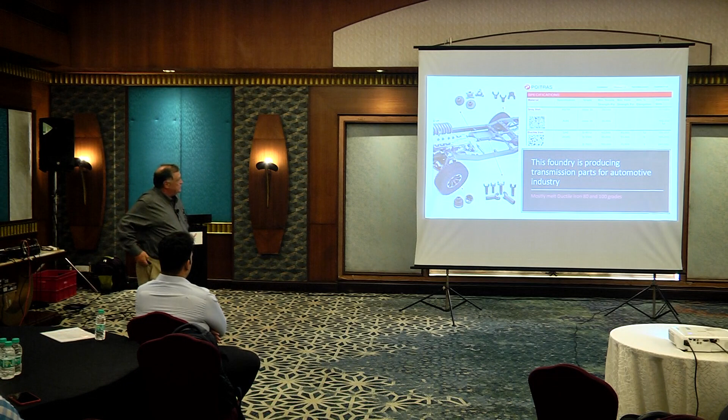So this is just kind of an introduction of what this foundry is. It's an automotive foundry. They make various automotive parts, from transmissions all the way to other areas.

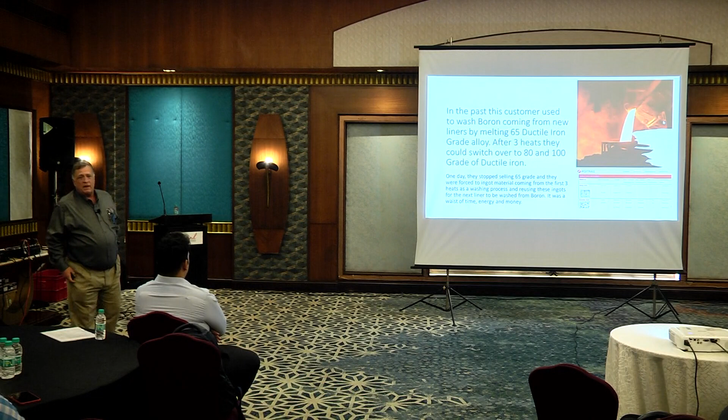In the past, the customer had to wash boron coming from the liners by melting 65 grade ductile iron alloy, and after 3 heats they could switch over to 80 to 100 grade ductile iron. Then one day they stopped selling the 65 grade, so they had no choice but to do wash heats, because their customers, as we're finding in Europe, are requesting that the boron content come down. They would have to melt 3 heats and just pig it out to get to a point where the lining no longer gave off boron.

This foundry has two 3.5 ton ABB and two 9-ton ABB furnaces. They used to use something probably never seen in India, but used in Canada and a bit in Europe, called LD, which is low dust silica. That was made back in the early to mid 90s to reduce the amount of dust people breathe in during installation. We have new products for that which we'll talk about later. Method of charge is with a magnet, and they have different top capping methods which we'll discuss later too.

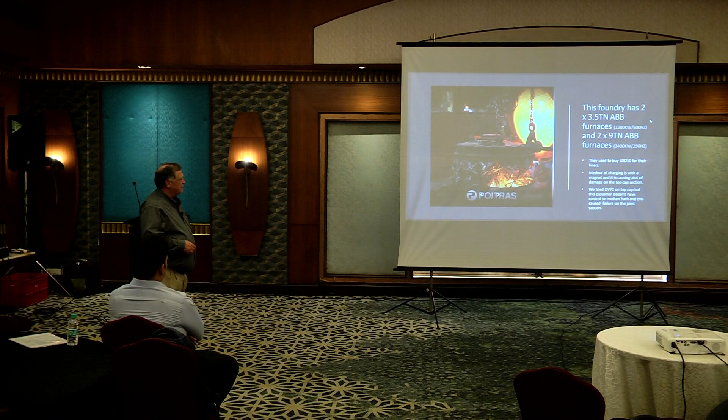As you can see, they're filling the walls. It's basically the same process—nothing different as far as the installation goes. The installation process is exactly the same.

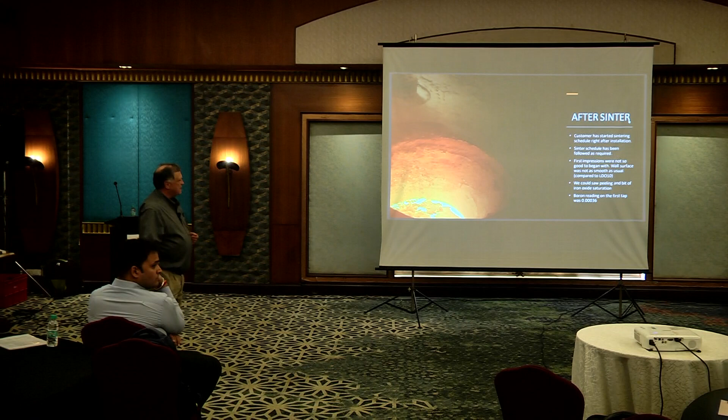What they found, and this has been an issue in the early stages, is the customer sintered it exactly the same way as their standard linings, which is about an 18-hour sinter cycle with solid charge. The sinter schedule has been followed as required by them.

The first impressions weren't good from this particular customer. In the initial hot face, you can see a little bit of peeling of the liner right down in here. That peeling was very thin—it was skin, mostly, like a skin peeling.

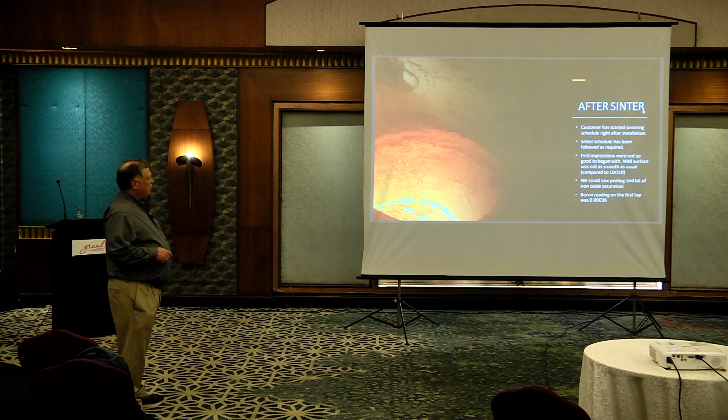But what they did like is that their boron on the first tap was at 0.00036, almost non-existent, and that was well within the specifications of their customer.

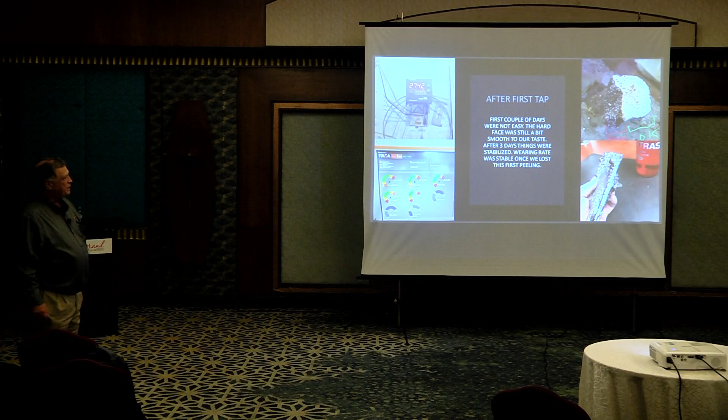As you can see, the first couple of days were not easy. They had hot face issues which concerned them because it was a new product—we don't blame them whatsoever. After 3 days they were stabilizing. The wear rate stabilized once we lost the initial peeling of the hot face, and the lining ran quite well after that. It really wasn't an issue.

So 70 tons, 300 heats. The only place we still had an issue was in the bottom—there was some of the bottom that was missing, but not enough to cause any harm or damage or even alarm.

Mid-campaign they stopped. The customer decided to push it at 320 tons. They could have gone longer—the lining was still perfectly good. But since it's an experimental material, they wanted to take a look at it just to see.

Before we sold the ideal rammer, campaigns for the LDO10 were 650 tons. Now they're using the ideal equipment, and the campaigns go up to 850. They were using a different vibrating method that just wasn't sufficient for their needs, and just by changing the vibration method they were able to get better lining life.

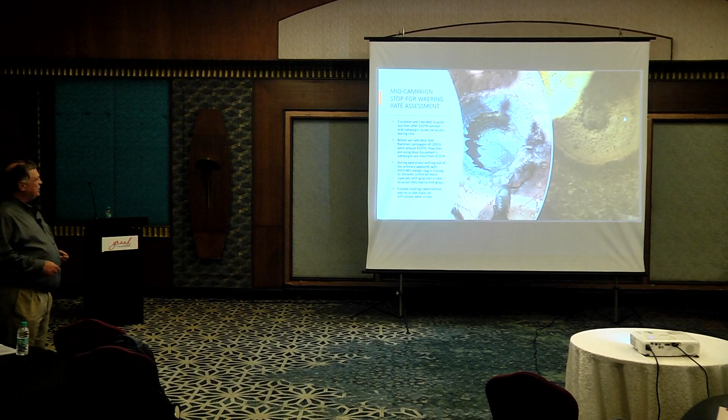During the operation, nothing out of the ordinary happened with the boron-free silica, except for the walls being a little brittle. Furnace readings were normal, no visible cracks, and infiltration was not visible.

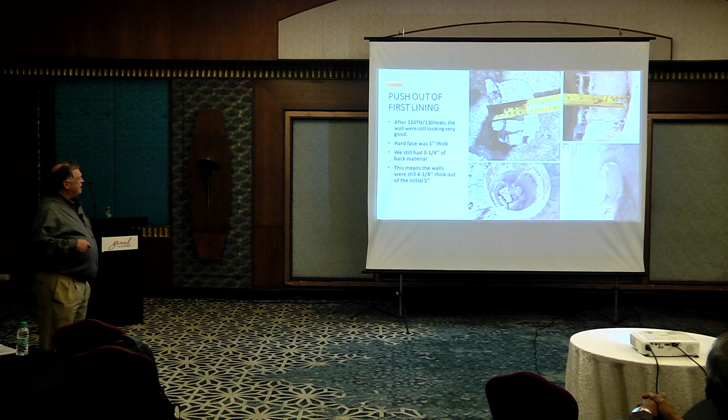Then they took it out and basically analyzed every layer as they were taking it out. As you can see, there's still about 100 mm of lining left, and you can see there was quite a bit of loose backup still present in that lining. So that lining could have gone a lot further, but they took it out again just so they could do an analysis, since it was the first time they used it.

So now we went to the second one, and they wanted to find a way they could control the sinter a little bit more without adding boron oxide, of course.

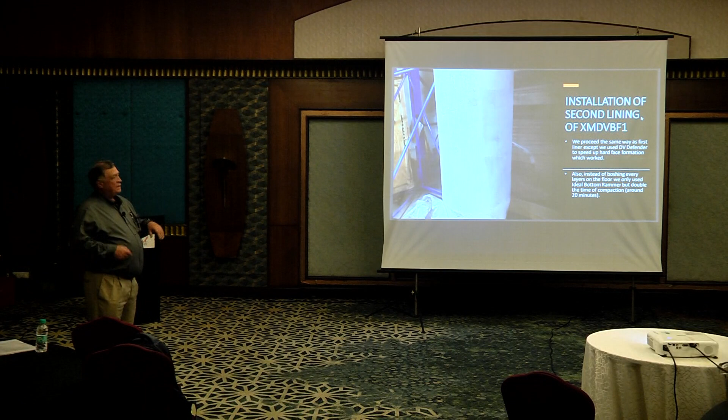Allied has a product, it's here, it's called DV Defender. DV Defender is a paint, and you paint it on your former and let it dry overnight, then do the installation of your silica just like you would normally. During the sinter cycle, this is a very low melt temperature coating that seals the silica, seals the porosity of the silica, so it makes it a little bit easier to sinter a furnace.

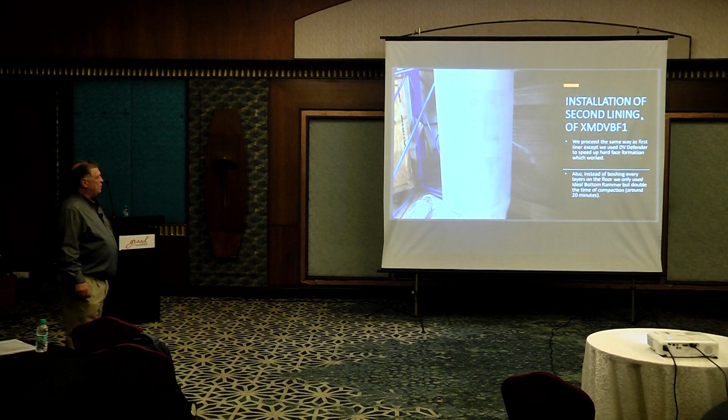And we thought that if we tried this, this may eliminate the peeling issues we had. So instead of boshing every layer in the floor, we only used ideal rammer, but doubled the time of the compaction.

After 95 tons or 40 heats, we could see a stronger hot face than the first lining had. Boron reading at the first tap was 0.0002.

First cool down after 140 tons, 60 heats, there was some brittle material on the floor. We sent samples to be analyzed, but again, it was nothing alarming. The lining could run a lot more time.

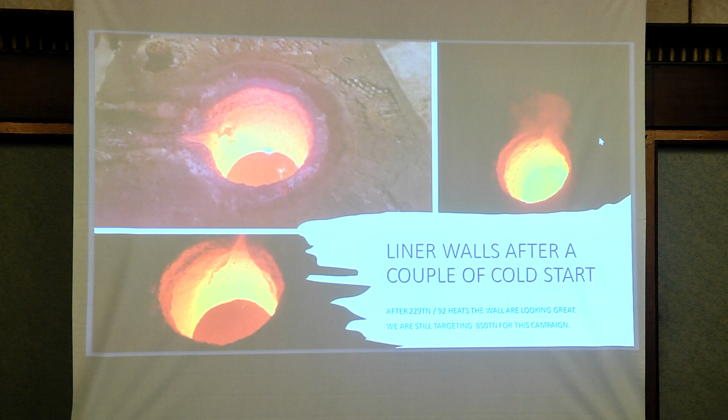Liner walls after a couple of cold starts. After 92 heats, the walls are looking great still. We're still teaching, we're still targeting 850 tons.

So after 400 tons, observation is the wear was the same as standard silica, except on the floor. And of course, the boron content is coming way down.

Like I said, this is an experiment. We've been working on this product. Some of our competitors have also been working on this product for up to 10 years. Believe it or not, you think just taking boron oxide out and putting another bond in would be easy. Turns out it was not. So this took a very long time to develop. This is probably the third generation of mixes that we've made, and I think that we finally found a winner in this one.

So if you have any concerns with boron content in your castings, we have this available if required.

So the second lining push out. They stopped after 523 tons, but the liner was still good. Again, they wanted to get it out so they could do maintenance of the furnace, but they also wanted to see it again, to see what it looked like with more heats on it. Step by step, they just wanted to be careful.

In concordance with usual campaign, there was no difference. They checked their lining every time they take it out. Hard face had an overall thickness of 1 inch. Wall thickness in the midsection was 3 inches. And you can see that we had a very good hot face formation, followed by a very good semi-sintered zone. So everything was good.

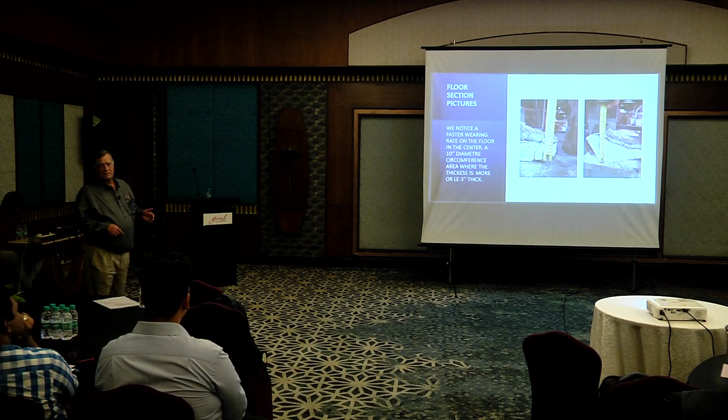So now they're going to the 9-ton furnace. The customer used 2 bags of no-bond material before installing the floor. And again, they use the exact same thing. They're going to use the jolter.

And we did use Defender on this form again, just to let you know. So the ideal rammer vibrated the form for 15 minutes in the taper, and 2 minutes every 4 inches, going all the way up the wall.

Again, they did their normal sinter with solid charge. Quite frankly, in a 9-ton furnace, in this particular case, I'm probably going to recommend that we liquid sinter with heat. There's several ways of sintering a furnace, but liquid sinter with heat, where you heat it to 1100 degrees, 1000, whatever you can get, with charge in the bottom, and then you pour liquid metal. I think that will probably enhance their hot face.

So the hard hot face would have benefited from Defender coating on the steel form, as we found out. The 9-ton furnace is using 3,400 kilowatts at 250 hertz. And again, they're using the magnet on this furnace also.

So we discussed better charging practices, of course. There's no space there for them to put the shaker system, so they have no choice but to go with some sort of a magnet or a bucket charge. I think they're trying to talk them into a bucket charge. It's a little bit more controlled.

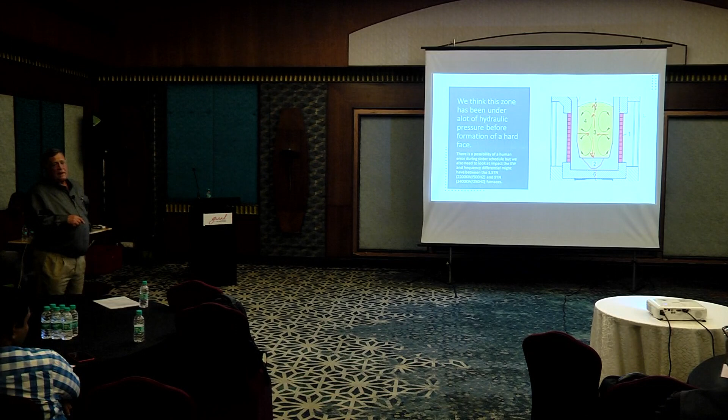So there's a possibility of human error during the sinter cycle, but we also need to look at the impact of the KW and the frequency differential that might have been between the 3.5 ton. We believe what happened was there was a problem in the installation, and the furnace got saturated, and that saturation caused very rapid erosion.

So next steps and possible solutions: we'll modify XMDVBF to accelerate hot face formation. We're now in the process of making a 4th generation. The customer will install 2 coats of Defender on the steel form every time they do it. And the sinter schedule could be modified to increase final temperature and allow heat to radiate to the floor, promoting a hard hot face.

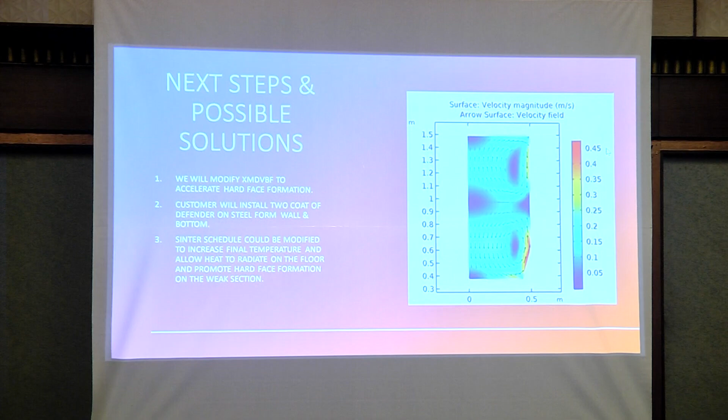This is where I was telling you, I believe if you did a liquid sinter, that would alleviate all of these problems because you'd form a much faster, much cleaner hot face. What happens is when you get molten in the bottom first, you have a small amount of metal with a high amount of power. So that metal is just churning very fast, and that material doesn't form a very quick hot face, and it probably prematurely saturated.

This is the next new silica product that we've developed in the market.

But unfortunately, economically speaking, there's nothing better than silica in iron. So the governments, who know nothing about what we do, don't think about that. They just think, let's eliminate silica. That would cost every foundry about 10 times more than their lining cost.

So we've developed this product called TEK-SIL. It's a silica with 99% lower respirable silica, meaning that as you're doing the installation, there's almost no harmful silica being breathed by the workers. Respirable crystalline silica is a common material found in many naturally occurring materials.

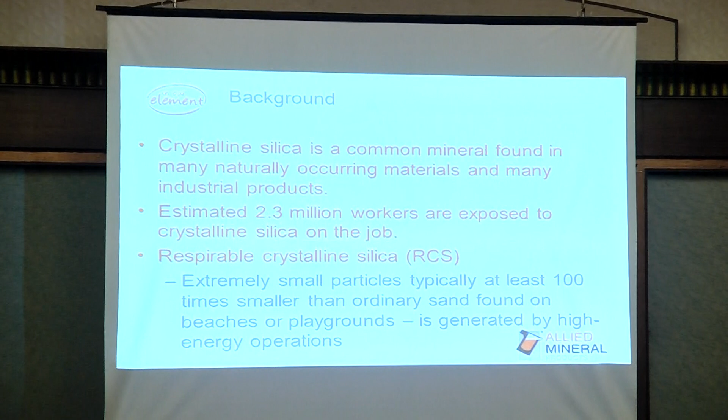It's estimated that 2.3 million workers are exposed to crystalline silica on the job. Could be in foundries, shot blasting, or processing companies, so there's a lot of different areas. Extremely small particles, typically at least 100 times smaller than ordinary sand found on beaches or playgrounds, are generated by high energy operations, meaning crushers.

During crushing of the silica, as you're getting the different grains needed to make the silica, a lot of these very, very fine particles get caught in the process. So new material to combat OSHA standards was implemented in 2018, as the government was pushing manufacturers of silica to find some way to make this safer for the workers.

So the goal was to create a new silica product that substantially reduced the respirable silica on dry vibratables. Testing was done with amorphous silica incorporated by dry vibratable versus conventional silica and dry vibes.

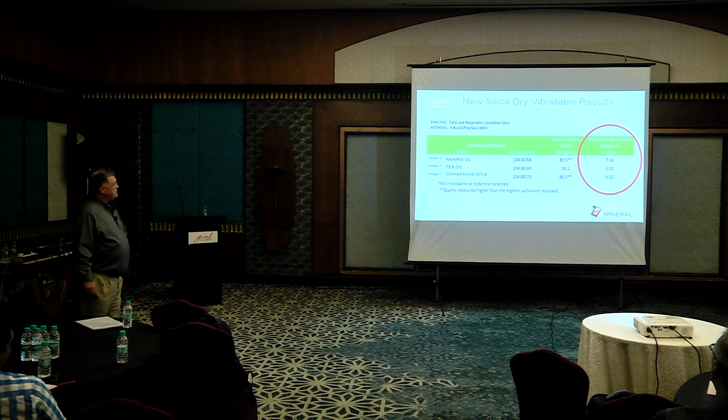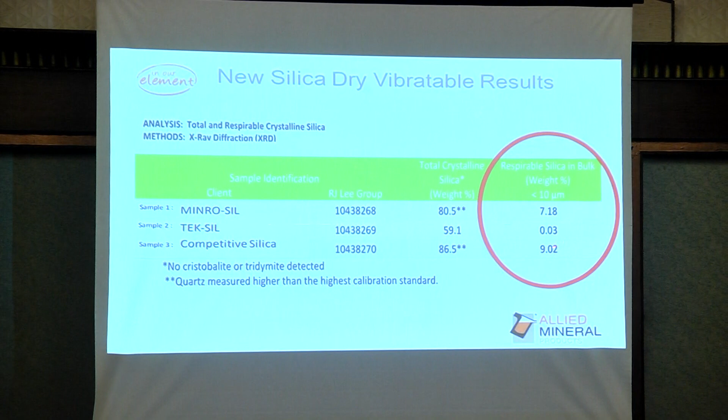So as you can see, here are the results of that testing. Our standard Minro-Sil is usually 7.18 percentage weight at 10 microns and lower. TEK-SIL was 0.03, and our competitor's silica was 9.02. So really, there was very little to any respirable silica the workers were exposed to. It doesn't mean you can take off your respirator and live the good life - it just means you're much safer than before if you follow all the safety procedures.

So the conclusion on the TEK-SIL is the respirable crystalline silica was almost zero. This allows us to provide material to our customers that meets new OSHA standards.

And it's coming. The time is coming where this isn't going to be optional, it's going to be mandatory, at least in the United States and Europe and parts of Asia. There are already parts of Asia close to making this mandatory. I think South Korea is considering it.

We're looking for repeat orders. We've had very good success with our trials in this. Enforcement of regulation seems not to have been a priority for the last two years, and I think we made really good progress.

The other thing you need to look at is that silica is bad for your workers, period. If you're not wearing the proper respirators, if you're not taking the proper precautions, we have several workers—at companies we purchased recently—where we found at least a couple of them had silicosis, from working on a line with tap hole clays for blast furnaces for 35, 40 years.

That continual exposure is very harmful, so using a respirator and using a new product like this can greatly eliminate it.

The other thing you have to do is, if you buy new equipment, for goodness sakes, spend the money and get an automatic push-out device. Because the one thing with this product is, as you're installing it, it's harmless. When you remove it, it goes right back up to the high crystalline silica danger levels.

So you have to have an automatic removal device to further extend the safety of the process, and it just makes sense. In the long run, an automatic lining removal system is going to save you money, not cost you money. It's going to cost you money up front, but in the long run, it's going to save you a lot of money.

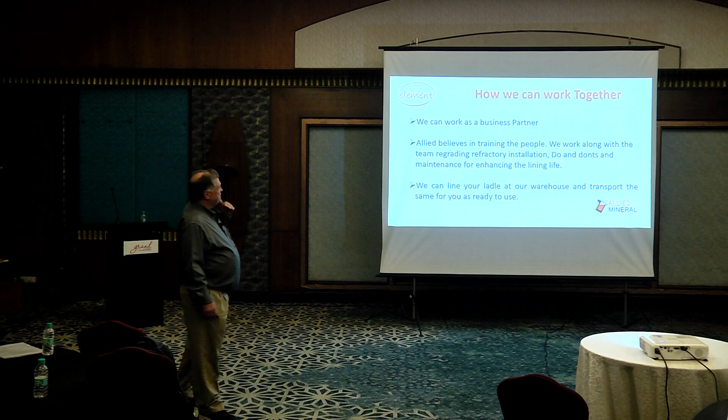If we're working together and tracking the cost—most important—then we can look at that bottom number at the end of the campaign: how much patching, how much energy was used, how much regular lining, formers, all of these things. Then we can give you a pretty good idea of operational cost of a lining rather than how much you pay per kg for something you throw into a ladle.

I see the worst products in the industry being used in these ladles, the worst, in most places I go. And the same thing I hear every time is, well, it's cheap. Well, it's not cheap. It may be cheap for the first time you install it, but it costs you money in the long run. So let's talk about configuration of ladles and product selection.

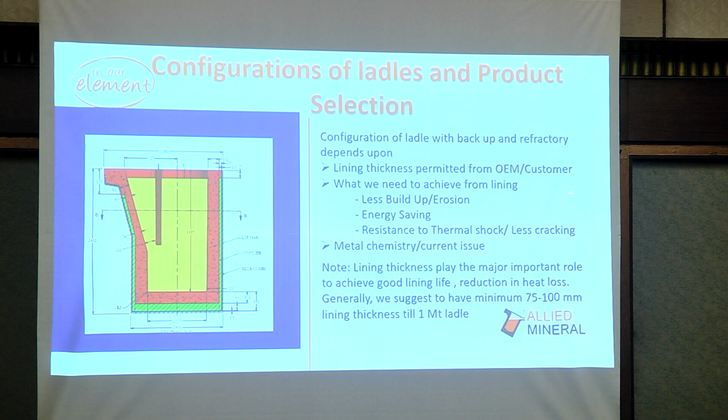The configuration of the ladle with the backup refractory depends upon lining thickness from the OEM. This is a really important thing for any of you who are purchasing new ladles from a ladle manufacturer.

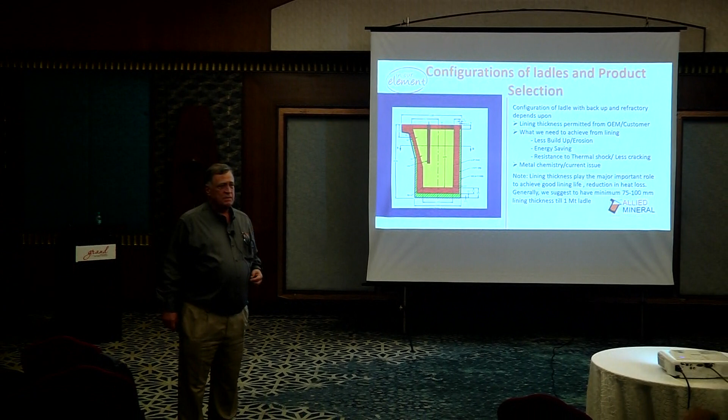Ladle manufacturers give zero thought to refractories, zero thought to how much heat you're losing in a lining. I mean, how many ladles do I see here that are 2 to 5 ton and they're using 50mm of refractory? And then somebody tells me, oh, we're losing too much heat. I'm like, well, there's not much you can do at a 50mm lining to try to save energy. So you need to push, and this comes from the initial design, because you have to be able to maintain certain weights at the ladle as well.

Those weights have to correspond with cranes, has to correspond with the space you have in front of the furnace. But if you can work with the OEM, the manufacturer of the ladle, from the beginning, and get yourself 100mm or even 125mm lining depending on the size of the ladle, then we can start to recommend really good processes that can lower your heat loss. And if we lower your heat loss in the ladle, we can lower the tap temperature in the coreless. If we lower the tap temperature by even 50 degrees, we can greatly enhance the lining life of the silica. So it just keeps building. If you do things correctly, it reduces cost everywhere. And with high energy costs coming, if you can save energy cost by reducing your temperature, it's well worth it.

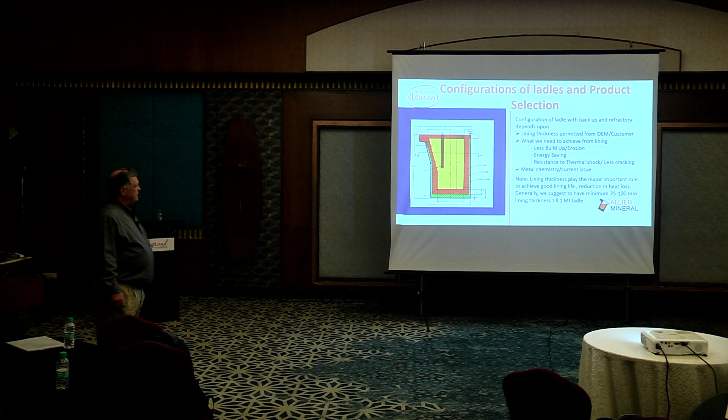Metal chemistry is also a current issue. Lining thickness plays a major important role. Again, working with your ladle manufacturer is absolutely critical in a new startup, or you can do it in an existing operation. You just have to make sure you have crane capacity and all of that.

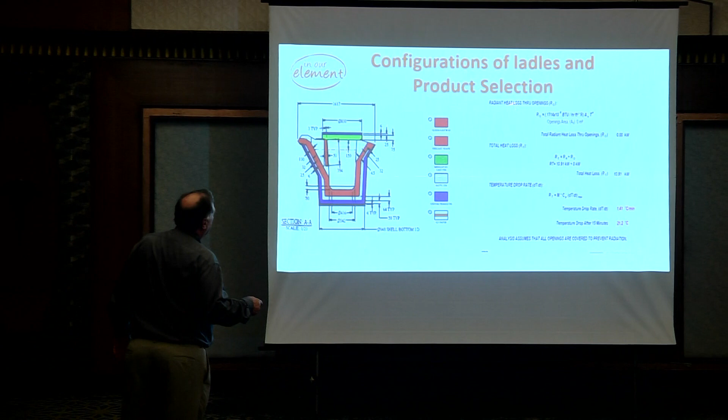So, configuration of ladle products. This gives you an example of one an engineer designed for us. Heat loss around 21.2 degrees. You can see where we put the different products. This is an insulating castable for the lid, a precast for this dam portion, and then quick cast 62 for the working lining. And if you have enough space, you can put board, you can put paper, and that really reduces your heat loss. But heat loss is also good in a ladle if you have buildup problems, because the less heat you lose, the less buildup. Buildup is a function of heat loss, partly. It's chemical, but it's also a function of that.

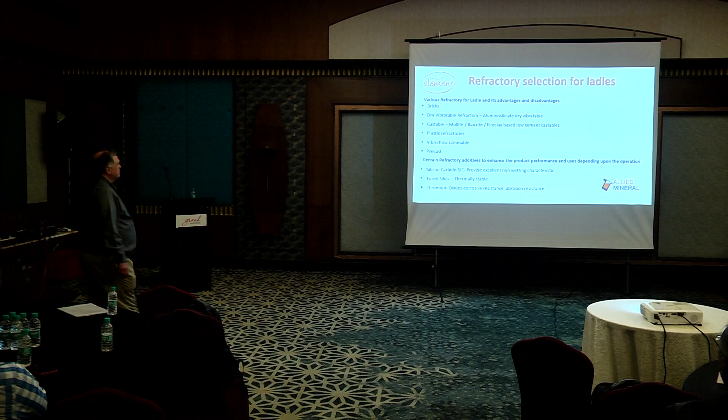So, refractory selection - various refractories for ladles and their advantages and disadvantages. You have bricks, dry vibratable, castable, plastic. This is called Vibro flow, a product we have that's like a vibration plastic, basically. And precast.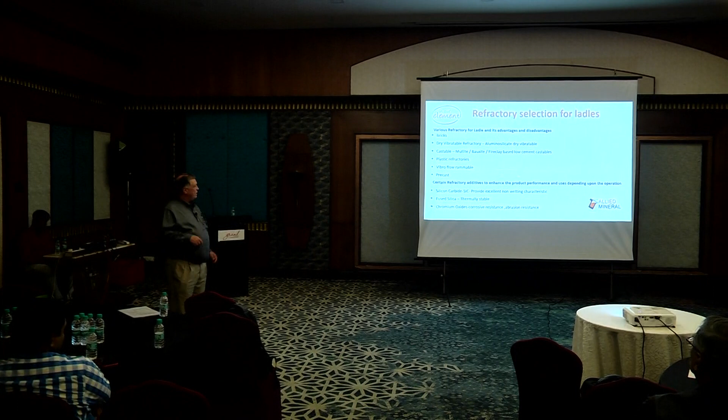Then there are certain additives you can put into the refractory to enhance performance depending on your operation. For ductile iron, you use silicon carbide to stop the buildup. If you thermocycle the ladle often, you can put fused silica in the castable to help stabilize thermal shock and reduce cracking. If you have problems with strength of the castables, with buildup, with corrosion and abrasion resistance, chrome oxide is a really good additive to help increase lining life and reduce problems.

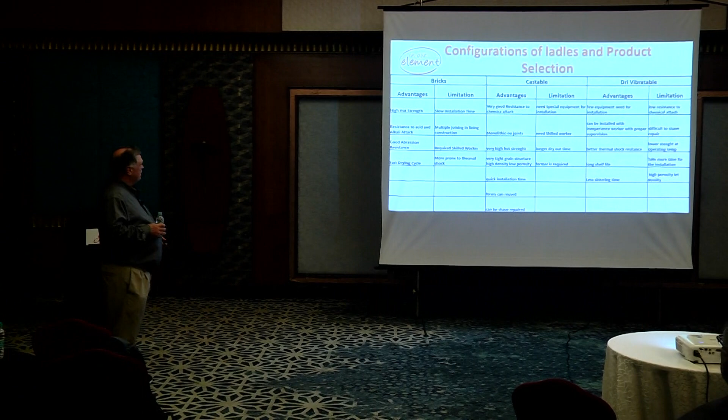We are with bricks, advantages and disadvantages. The advantages of bricks are good high hot strength, resistance to acid and alkali attack, good abrasion resistance, and of course fast drying because they're already dried. Disadvantages: slow installation time, lots of joints - basically you're building a lining with cracking. Skilled workers are hard to find who are really good at laying brick, and it's more prone to thermal shock. So if you thermal shock a brick, you're creating hundreds, maybe thousands of cracks because of the mortar joints.

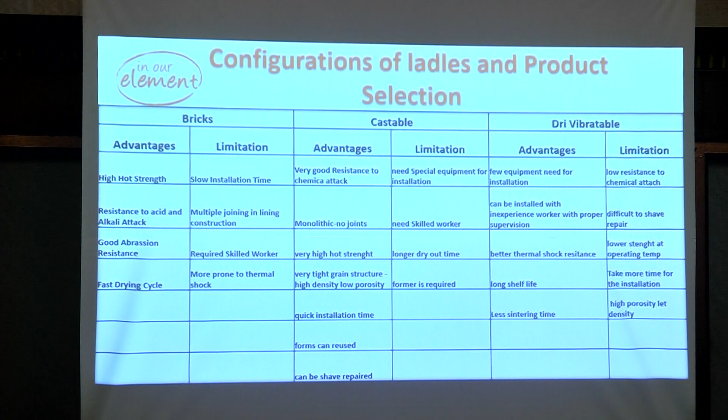Castables have very good resistance to chemical attack. When I say castables, I'm being general because there are so many different types, but this is a generality. Monolithic, no joints, one solid lining, very high hot strength depending on what material is being used. Conventional castables have worse hot strength than low moisture castables - low moisture have very high hot strength.

Very tight grain structure, so you get a very consistent tight grain structure from the installation. Quicker installation. Forms can be reused over and over, and they can be shave repaired, where bricks cannot. Limitations are you need mixers, vibrators, special equipment. You need skilled workers also. You have longer dry out time, and a former is required. So those are kind of the advantages for those.

Dry vibe, which is also a viable lining material. Not used very much, but it's viable in certain cases. Few equipment needed. You can do it by hand, basically. You can hand make your tools in the shop. You need skilled workers, longer dry out time. Oh, sorry, wrong one. Can be installed with inexperienced worker and proper supervision.

Better thermal shock resistance, a very long shelf life, and much faster sintering time. The limitations are low resistance to chemical attack. It's very hard to get a really good density in a dry vibe in a ladle application. So you get a lot higher porosity than what you would in a low moisture castable. It's difficult to shave because it's not necessarily the strongest. Lower strength at operating temperatures, takes more time to install, and like I said before, higher porosity than what you typically find in low moisture, low cement castables.

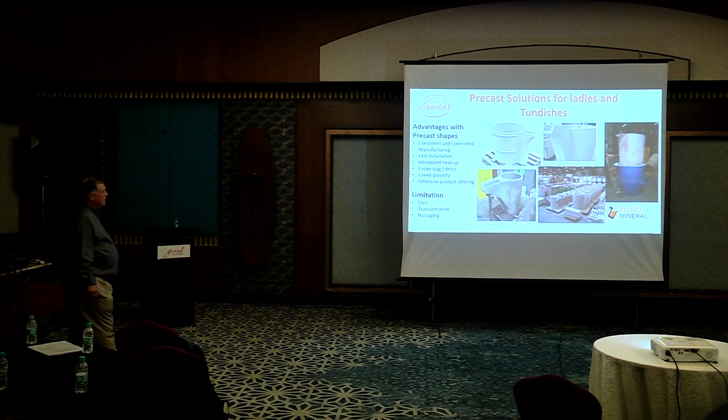Probably the fastest growing area for ladles in the United States at least, and in parts of Europe, is precast solutions for the ladles. So the advantages and disadvantages are many, okay? Consistent and controlled manufacturing, meaning that when we make these, we can control everything. We do very slow heat ups, very slow cool downs during the drying process, with specific equipment being used. It's very fast, minimized heat up, easier slag and dross removal, lower porosity, extensive product offering. So the limitation is really cost, okay? Transportation can be eliminated because you can find ways to pack it, no problem. But cost.

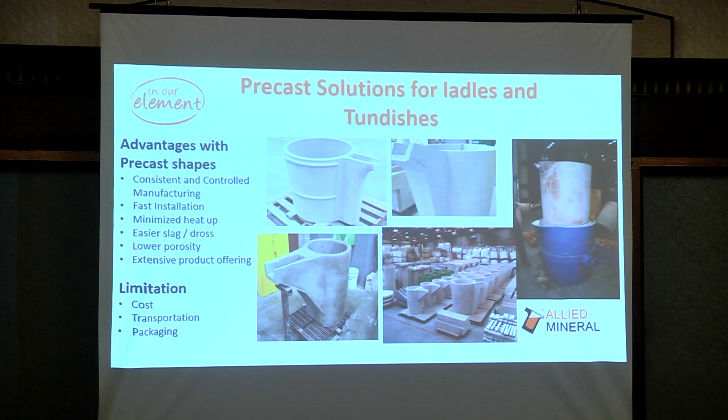But if you can reduce the amount of labor that you have, you can probably reduce the amount of people in that department and switch them someplace where their talents could be used much better. Then these types of shapes have a place in some foundries. Caterpillar is one of our biggest customers, and we supply them precast ladles all the way up to 15-ton capacity. And every single ladle they have from 15 tons down to 2 ton uses a precast shape.

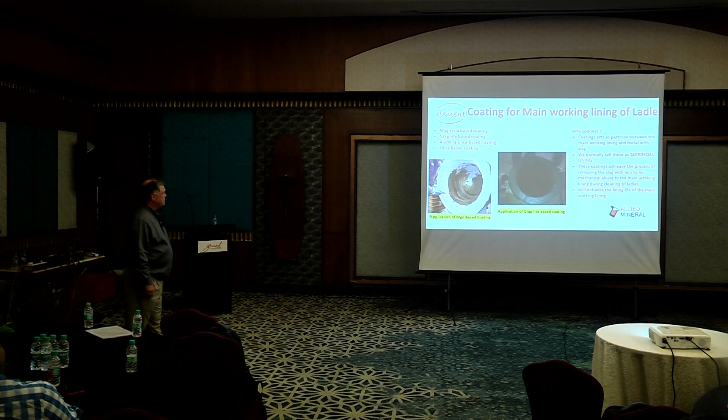So the coatings are anywhere from a magnesia-based to a graphite-based to an aluminosilicate coating, or even a silica coating, depending on the severity of the operation. So these are just pictures of some coatings that we put on. This is called T-coat. Many of you use it here, many of you have heard about it before.

So why coatings? Coatings act as a partition between the main lining and your cast, or the metal. We normally call these sacrificial linings. These coatings ease the process for removing slag, and they enhance the lining life. And there's other reasons too.

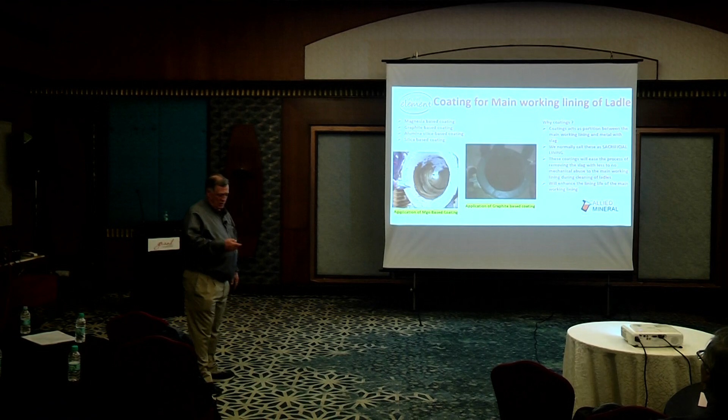T-coat, for example, is insulating. It's got 3 different types of fibers in it, highly insulating. So if you're using a cover on your ladle, you can reduce the heat loss drastically by using a coating of T-coat. It's kind of like cold board technology in a bag, except with cold board you have to go with one thickness, you can't change it. With T-coat, if you are happy at 10 millimeter, you can put 10 millimeter. If you need 20 millimeter, you can put 20. You can do whatever you want. You can put it thicker in different zones than others. So it's very flexible that way.

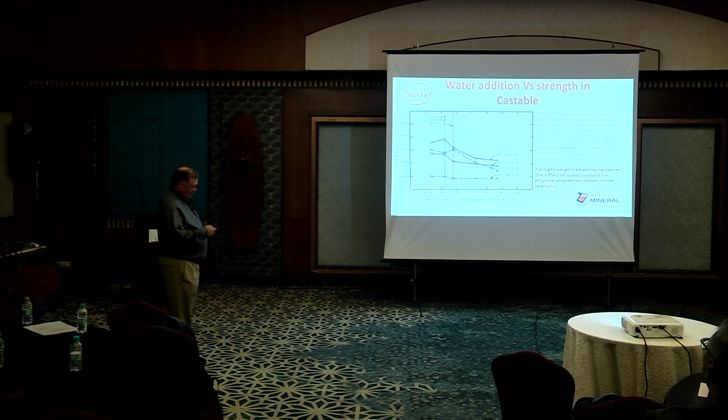So here's what I was saying earlier, when you have to add more water, because now you have to trowel a castable that's supposed to be vibrated at, let's say, 8 to 10% water. Now you need to trowel it, so you're going to add probably more like 10 to 12% water. And what happens is strengths of castables are heavily affected. When they say water range between here and here, that's a very serious point that you need to look at, because we know from testing that if you stray from that, you're not going to get very good hot strength.

So here's just an example of water content, 12, 13, 14, all the way up to 18, and this is your modulus of rupture. So at your maximum, or your recommended, optimal water content, this one is when you mix it a little bit lower, depending on what kind of equipment you have, then your strengths are pretty good. The minute you start increasing that water content, it drastically reduces the strength, drastically.

And this doesn't even take into account, like I just said, if you're sifting the coarse grains out, now you have a fine material, and you're like, oh, this trowels really good. Well, yeah, it's all cement. It's no longer really the chemistry of the product that you think you're buying. It's all cement.

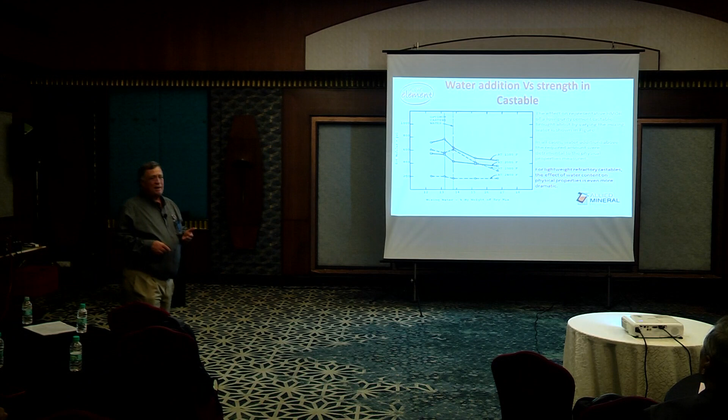So you have to think of it three-dimensional as well, because just because you're heating it at 260, and let's say you have 4 inches of ladle lining with some paper on the shell, you're not getting 260 all the way through. So a slow heat up is required so that you drive the temperature as far back as you can and maintain a more even temperature. So that slow heat up is required.

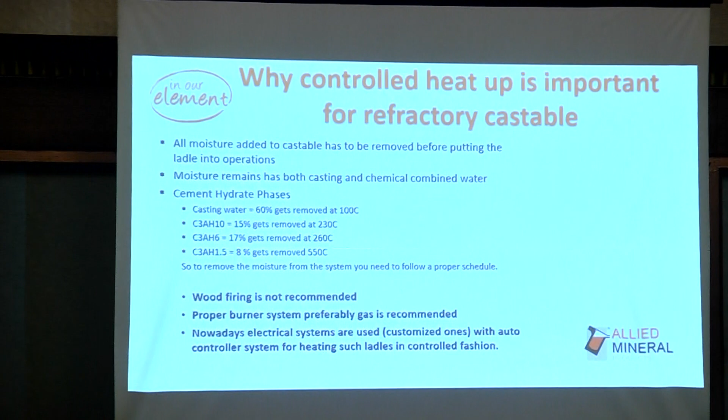So to remove the moisture from the system, you need to follow very strict rules. No wood. Wood firing is not an approved source of drying a ladle. You'll never get the water out at the temperatures of wood, you'll never get it out. And if you do get it out, you'll crack your lining because you have no control over the schedule and the heat up.

Sometimes it's done in an emergency. Some people do it and they say they have success. But we're not talking about being happy with what we're doing, we're talking about how can we do better. And I guarantee you, switching from wood to a more controlled system, you'll do better. Gas is recommended.

However, there are some good, very good resistance heater type applications with automated controls that also work really well.

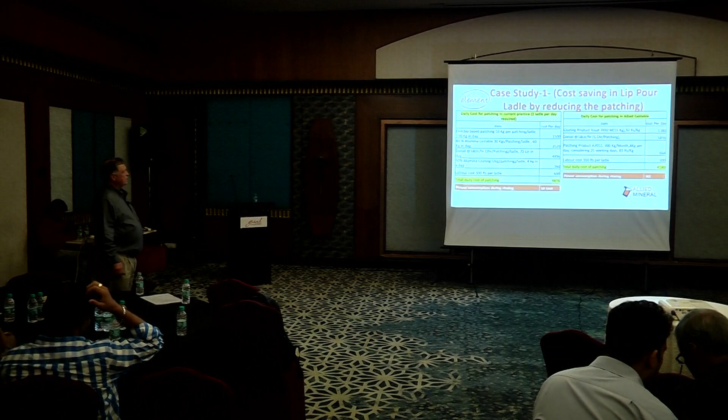So let's talk about some case studies. Like I was saying, most of these products we just talked about are not going to be the cheapest cost per kg. They're not, because it's not the same thing being used in most instances. Much higher technology, much better design, lower moisture type castables, designed for a specific temperature range.

So what they're talking about here with these case studies is basically daily cost for patching of a ladle. 2 ladles per day are required, okay? So they're looking at the cost by using the right product versus using the wrong product. The wrong product is what makes your repair cost much higher.

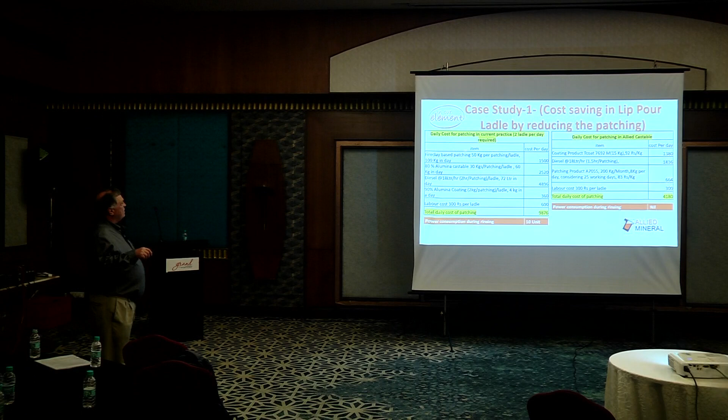So here we have a fire clay based patching, 50 kgs per patching per ladle, 100 kg in a day. So there's 2 ladles per day, so 100 kgs a day. Doesn't sound like a big deal, and everybody says oh no, it's okay. Well, over time that adds up, okay? It adds up. Not only in money, it adds up. If you're eroding these things fast, it's going into your metal. Some of it's being slagged off, some of it's going into solution, and you're going to have issues with quality.

So it's an 80% alumina castable, and they use 30 kgs per patching ladle, 60 kg per day. Here's the cost of the diesel to dry it. You can see they have all of the figures.

90% alumina coating, where they're using about 2 kgs patching ladle, 4 kg in a day. The cost of that, labor cost, 300 rupees per ladle. So then you look at the cost of the Allied product, and they have to have all of these products because it's more labor intensive and there's more things they have to repair.

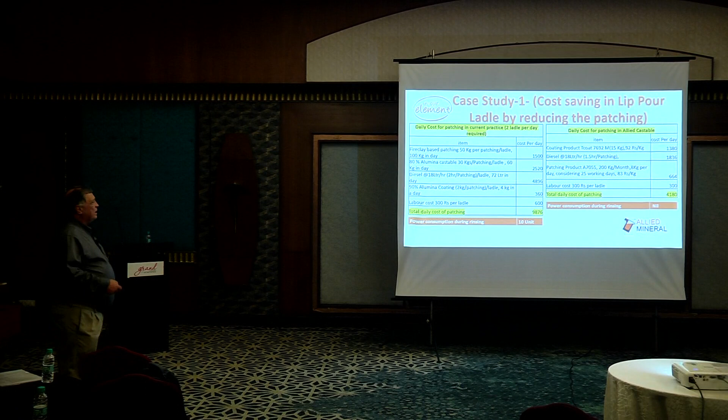So here we're talking about T-coat, what I talked to you about, the MGO insulating type of material. And they're using about 15 kg of material in 2 ladles at 92 rupees per kg.

Diesel, patching of product A7055, which is a fire clay based moldable type plastic material that has good trowel. You could actually trowel that one or hand install it. 200 kg per month, 8 kg per day. Considering 25 working days, 83 rupees per kg.

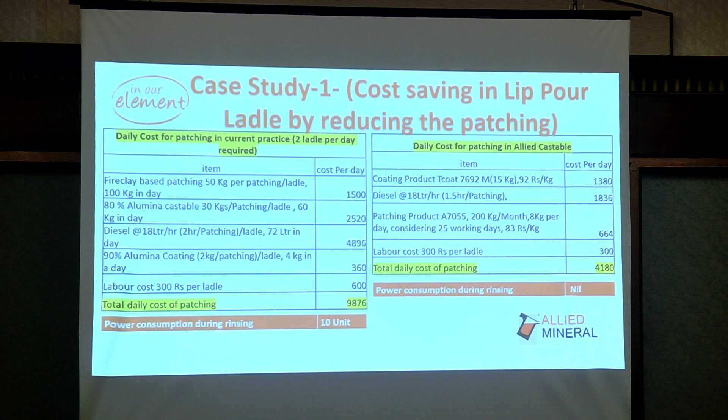So labor cost, 300. So even though these products, if you saw the price per kg, they're probably at least almost double what these are. But by following and tracking, less patching, less downtime, less labor, less fuel, it's actually more than half the cost of what they consider a cheap material, okay? That material no longer became cheap, that material became expensive.

So in summary, challenges in traditional practice: refractory consumption is more. Not only that, the other problem, when you start to modify, meaning let's say you trowel a castable that's not supposed to be troweled, you have very high porosity. If you have high porosity, you're going to have a lot of buildup, a lot. So that porosity is space between the grains on the hot face. And when you get a fluid slag, that stuff just saturates like a sponge into your lining.

So 2 times preheating required, so more diesel fuel was required by this customer. Rinsing the furnace with metal if the ladle sits idle for too long. Because your heat loss is so high, sometimes you have to do a wash heat on your ladle to get the temperatures back up again. And because you have to repair it more often, you lose the temperature, you've got to bring it back up to temperature. And manpower cost was tripled.

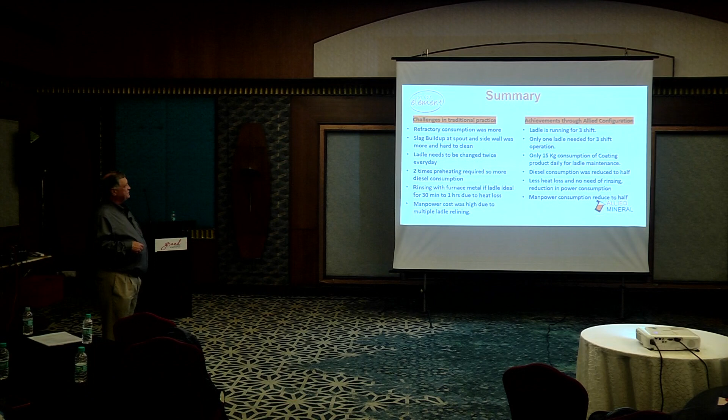So what did we achieve here? Ladles running for 3 shifts. Only 1 ladle needed for 3-shift operation. Only 15 kgs consumed for the coating. Diesel was reduced, heat loss was reduced, and manpower was reduced. So everything we wanted to accomplish, we were able to accomplish.

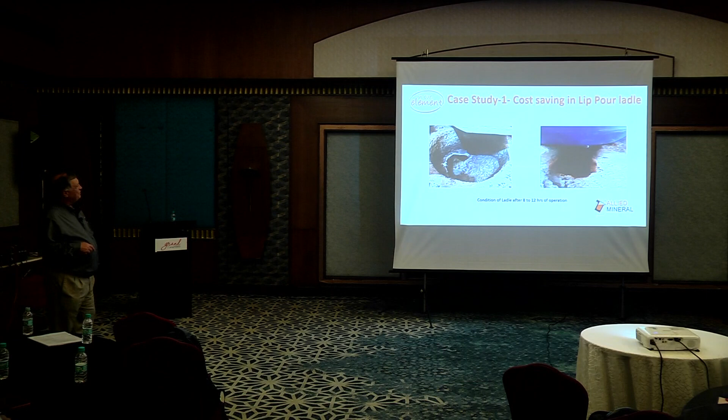Here's just some pictures of the cost savings in a lip pour ladle. And you can see the condition of the lining after 8 to 12 hours of operation. Looks really, really good.

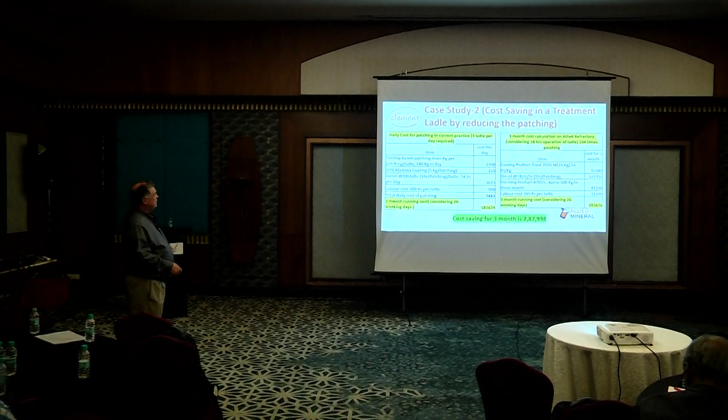So again, summary is the same thing: slag buildup near a treatment section. Daily, three times the ladle needed to be changed, in 4 hours six treatments of 144 in 24 hours, two times preheated, rinsing with or without metal. Idle for 30 minutes to 1 hour. Manpower cost was higher, so the ladle ran for 18 hours. With the use of flux also, 10 kg consumption of T-coat, much lower. Diesel consumption reduced, manpower reduced.

Due to continuous operation, localized metal impact area happens after 20-25 days, so we're working on suggesting a tundish cover over the treatment ladle to increase the lining life. That basically gives you a more focused area to pour into, but it also insulates your ladle and reduces splash. So those are things we're looking at to take it to the next level.

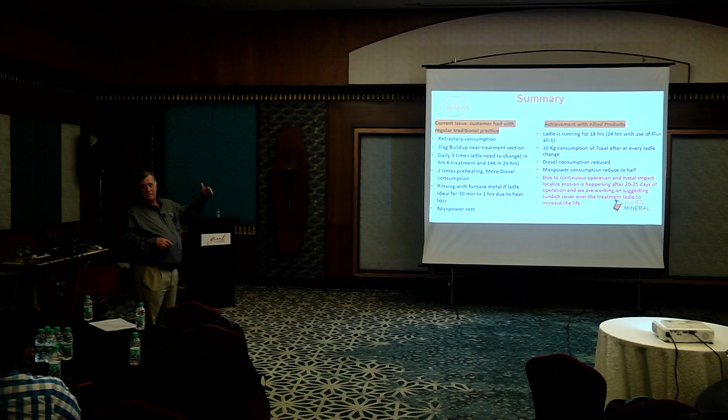You're never satisfied. You should never be satisfied. You should always be looking for something better.

Here's case study 3. Customer with the old configuration had 50 mm Super Duty bricks and a 30 to 40 mm conventional castable. But most likely they're sifting this so they can get a finer grain to install it better, and if not, they're increasing water content, which really affects their lining life.

So here they have 75 mm Quick Cast 62, and they're also showing one where they put paper. So furnace metal temperature, after-treatment temperatures: first box, middle box, last box. The average temperature drop from box number 1 was 6 degrees, and traveling time from box 1 to the last box is 5 minutes.

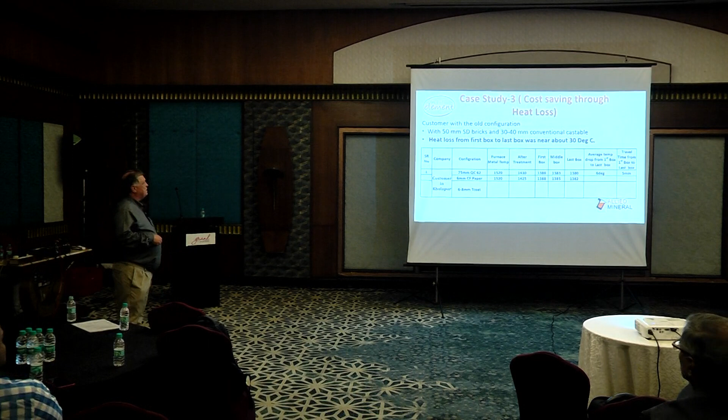There were also some cases where the temperature drop was high, and the customer was not able to pour the last box. So they also had losses because they weren't able to pour as many castings, since the metal temperature got too cold for their standards.

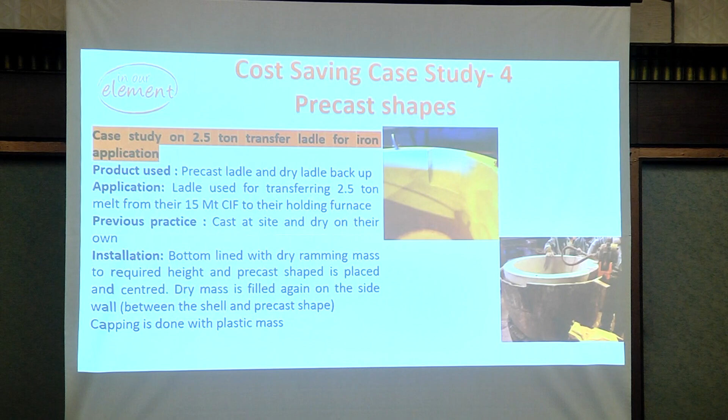So again, cost savings study 4: 2.5 ton transfer ladle. Product used is a precast ladle with a dry backup. The application is a ladle used for transferring 2.5 tons of metal from a 15 metric ton coreless furnace to a holding furnace.

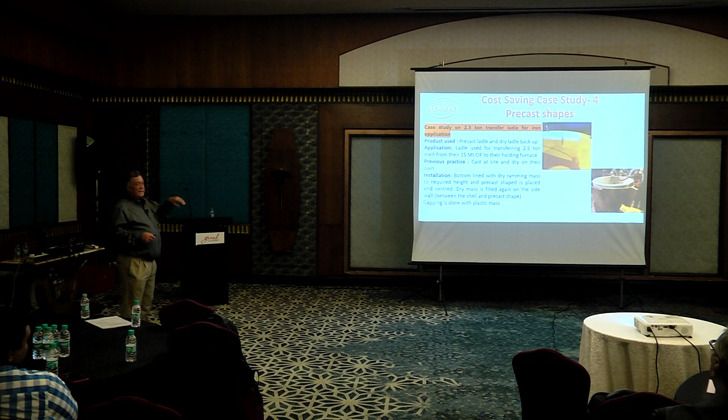Installation: bottom lined with dry ramming mass. First you put in the dry, level it, set it, fill it again with dry, and then cap it off, typically with a wet ram or a plastic.

So results: the first installation at this particular plant in July 2022 performed great. Full campaign for cast ladles was only 6 months, and with shapes we were able to surpass that goal - I believe it went all the way up to 9 months. So they got an extra 3 months of operation from the precast shapes, mostly because of drying mistakes and installation mistakes.

The second ladle was installed in October 2022, and additional orders are coming in today. So these precast ladles are not only outperforming their regular castable, but they're really decreasing the amount of labor and energy from gas. So it's cheaper in some cases to run in the long run, but that's case by case, because precast shapes do have some limitations in that they're very expensive.

So the next thing we're going to talk about is elephant foot erosion, which everybody seems to struggle with - some people struggle more, some less. It's usually a procedural issue.

Everybody's like, how can we eliminate elephant foot? In a lot of cases, you cannot. You can't eliminate it, okay? It just happens. But what you can do is you can slow down the rate of erosion. You get a lot of stirring action in that taper section and floor, lots of it. You get a lot of mechanical abuse. All of this happens, and there's a lot of chemistry variations that are typically happening. So the best you can hope for in most cases is that you push it to get more lining life, but you're never going to be able to eliminate it completely.

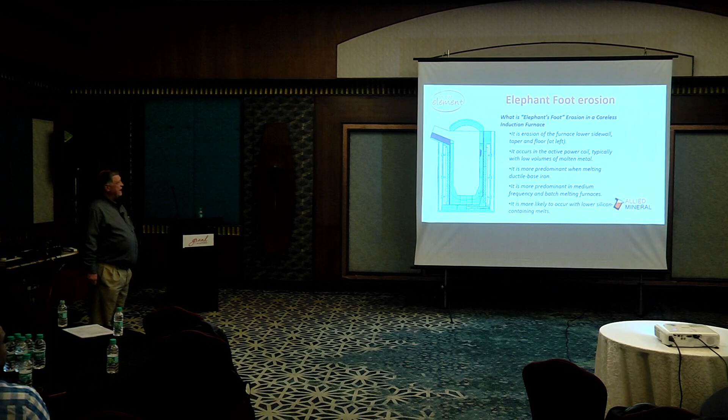So what is elephant foot erosion? It's erosion of a coreless furnace. It's erosion of the sidewall, the taper, and the floor. It occurs in the active coil, typically the lower portions of the furnace. It's more predominant when melting ductile iron, and several reasons for that we'll go over. It's more likely to occur with lower silicon containing metals.

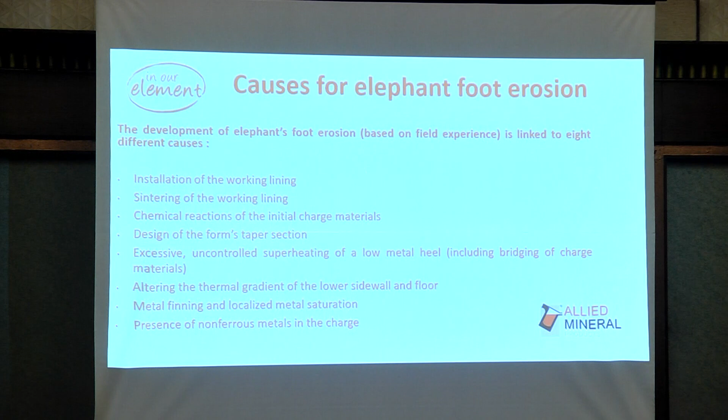So the development of elephant foot erosion is based on the field experiences linked to 8 different causes. Installation of the working lining can cause it. That means you get saturation, which actually lowers the melt point of the silica and can lead to rapid erosion. Sintering, again, those two come together. If it's improper sintering, you're going to get either penetration and superheating, or saturation and melting of the lining.

Chemical reactions of the initial charge materials. Charging process is most critical for elephant foot erosion. If you want to extend the lining life of your coreless, stop putting steel first. The worst thing you can do is put steel on top of silica. Stop putting carbon in the bottom of a furnace. That's another worst thing you can do.

So there are other processes that you can do. You can charge in returns. You can charge pig iron first. But steel shouldn't be added until you're about 50% molten, and then that can be added with less effect. By that time, you're able to add ferroalloys to adjust it very quickly also. But throwing carbon in the bottom of a coreless furnace is the worst thing you can do to it.

Excessive uncontrolled superheating. I mean, if you're freezing metal in the bottom, and we have people that think that because they freeze the metal, they can heat it fast. Not here, I've never seen it in India, but I've seen it before in other areas. Sometimes they intentionally would freeze metal in their furnace thinking that when they start it back up, they can go fast because they have a dense charge. Well, what happens is bridging and superheating. If you freeze the furnace, you better heat it up really, really slow, because every time you heat it too fast, you're going to bridge, every time. And then you're going to have an uncontrolled erosion that you'll have no idea is happening until it's too late.

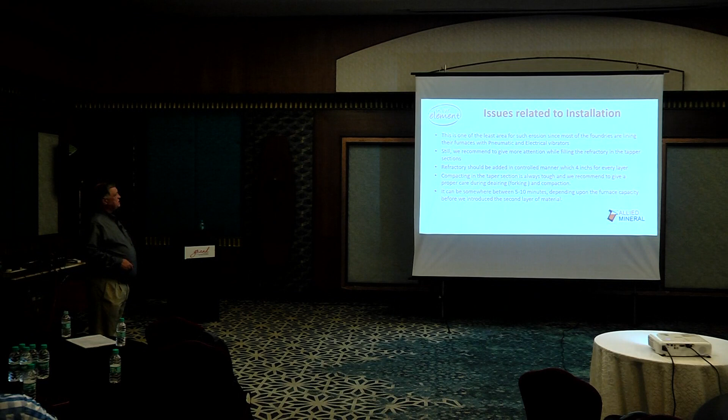That's simple. Still, we recommend giving more attention while filling the refractory in the taper section. Refractory should be added in a controlled manner of 4 inches per layer. The bigger issue is when you get to the taper. Rather than going 4-inch layers, you should actually go 2. And you need a tool that can get down into the taper section, depending on the angle, how severe the angle is, because it's very difficult to compact that material.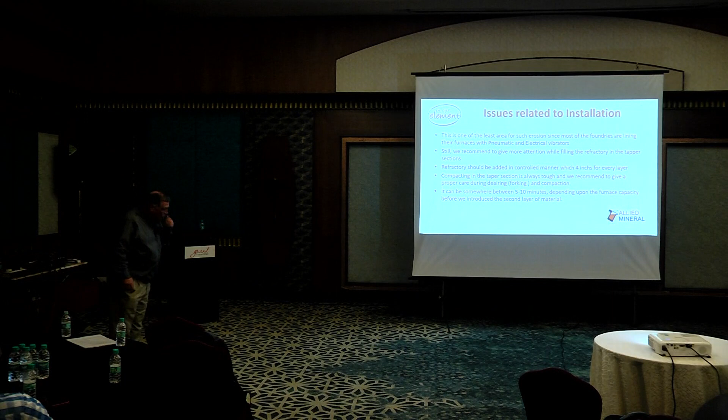Very difficult. If you're using a jolter, then you want to decrease your rate of ascension. So you need to slow down how fast it raises, maybe half of what you do for the sidewall. It can be somewhere between 5 to 10, as we already talked about.

So, sintering. The purpose of sintering in a coreless induction furnace is to develop an optimum ceramic hot face. The intention is to develop a ceramic hot face that has minimal saturation. Sintering refractories requires accurate temperature control, with thermocouples.

Careful selection of charged material, starter blocks, used for initial heat up. If any one of these aspects is ignored, the area in the furnace that will first suffer is going to be your taper and your floor.

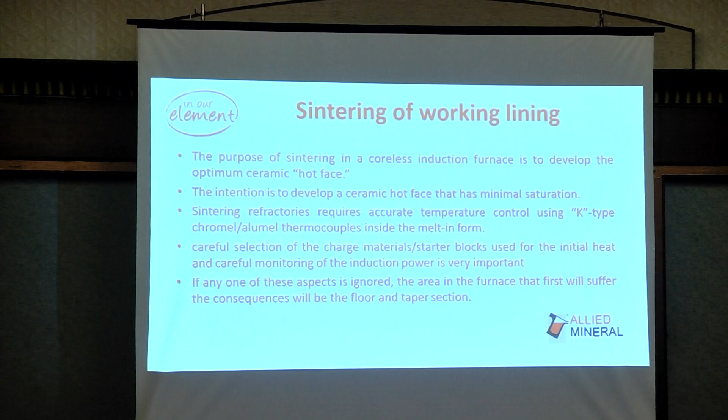Chemical reactions. Thermodynamically, there's an equilibrium carbon-silicon ratio. So if you throw off that carbon-silicon ratio, and your metal needs silicon, for example...

So you're charging steel in the bottom of your furnace because you claim that it melts faster and you can save time. Well, that may be true. I don't believe it, because there are other ways we can control this, by controlling the scrap size and using different types.

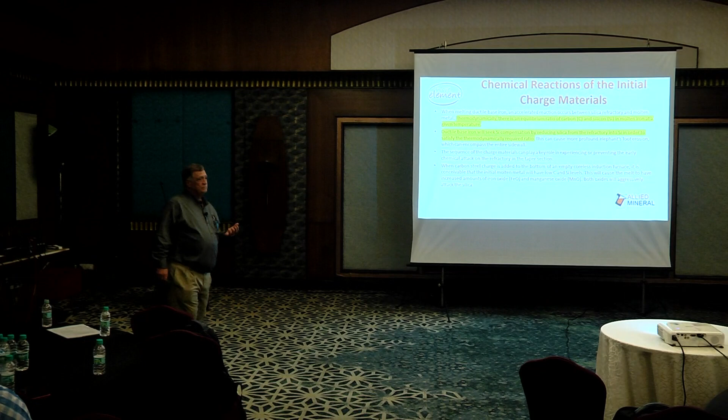If it's hungry for silicon, silica is a very unstable material. It wants to give up its oxygen really simple. So if you're dumping carbon in the bottom of the furnace, or putting in something with very low carbon, and that carbon-silicon ratio is way out of range, then that metal is going to take the silicon to try to make it more even. And it's going to take it from the silica.

The sequencing of charging materials can play a key role, and it does. I've heard several excuses why they can't charge returns first, why they can't charge pig iron first, why steel has to go first, why carbon has to go in the bottom. No, steel does not go first, carbon does not go first. Period. There are so many ways to increase lining life, and your charge sequence is the biggest one. You can play with it, adjust the percentages, whatever you want to do.

I went to a foundry in Turkey with a 30-ton furnace. They were putting 30% borings on the sinter cycle in the bottom, and wondering why they were washing out the taper section and floor so quickly. They had no idea what the chemistry was, first of all. It was wet, second of all, and it's quite aggressive with the oils.

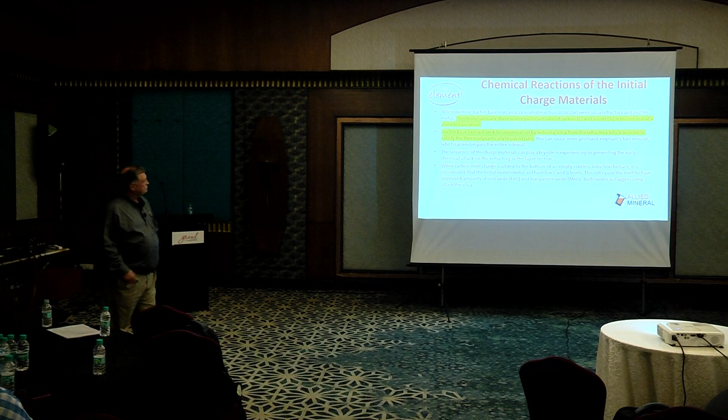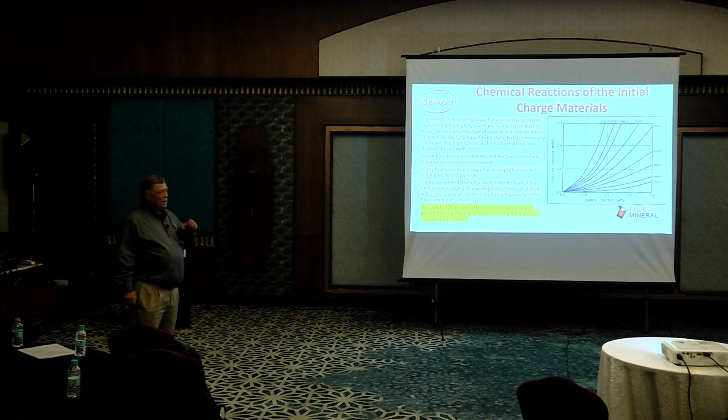So anyways, charge sequence is important. Even if you have returns, they say, oh, we can't charge our returns because we don't sandblast them. They're sand. Sand is silica. Additional silica in the bottom of that furnace isn't going to hurt you. You could add ferrosilicon in the bottom, and that would probably help you. So if you have sand on your returns, even if you get buildup in the taper section, I can get rid of that buildup in 2 hours. That's no problem. But if you erode it, you can't add refractory back.

So this is just telling you what to avoid. This is the carbon-silicon equilibrium, which we've seen many times, showing where temperature lies and what happens with all the aggressiveness. So if you have low carbon, low silicon, you're going to have issues if that's what you're melting in steel.

If you're putting in pig iron with high carbon, low silicon, which is typical, then you need to put some ferrosilicon in the bottom of that furnace because you need to stabilize that metal as quickly as possible. Otherwise, it will take it from the lining—very easily take it from the lining. And that's all silica, okay? No matter whose silica you use, that is an international fact.

When you start getting down into these levels, you have big issues because it does take the silica, and it's going to take it from the bottom first because the bottom is at higher temperature. It's going to be more skewed chemistry, and it's going to come out quickly.

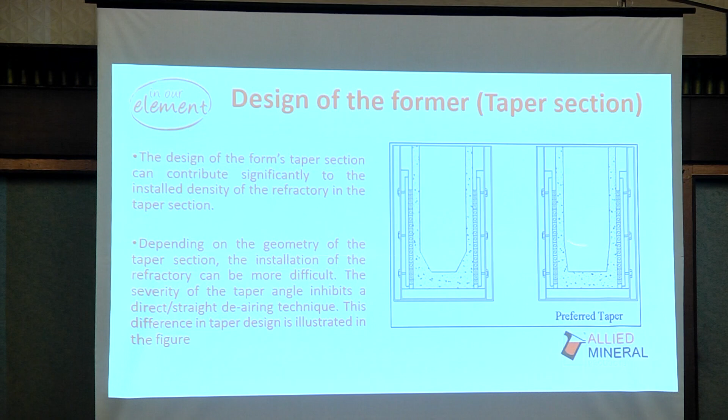We can't tell you that. But you certainly can change your taper and your form, adjust and track the results, and then you can find what's optimal for your furnace. These are standard designs that have come for decades with these size furnaces.

Taper section, the foundry should not expect the refractory to flow down and around. This is what I was talking about earlier. I would reduce the thickness of the layers when you get into the taper section depending on the severity of the taper, because you really have to try to get in there. And if you're using a jolter, you want to slow the rate of ascension so that you're getting more vibration in the taper than you do in the sidewalls. All of that is normal so that you can get maximum density.

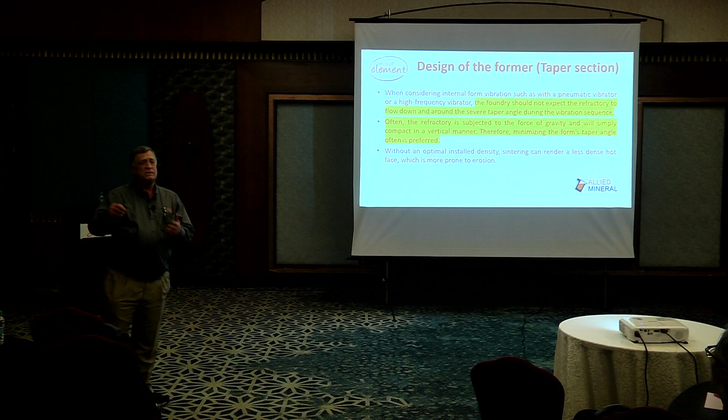If there's any question whether you're getting maximum density, when you take out your lining, set a piece aside from the taper and send it to us and we'll check the density and tell you exactly how well you did. You can do that on a periodic basis. We're more than happy to do that. That's part of our service so that we can keep control of your process. We all lose control of processes, even in the refractories industry.

Excessive uncontrolled superheating, we talked about that also. Freezing the furnace, adding too fine a charge in the bottom of the furnace, too dirty a charge in the bottom of the furnace, where you're going to get superheating. Superheating is simply using too much power, or bridging, where you're using the normal power, but you're heating a much smaller volume of metal.

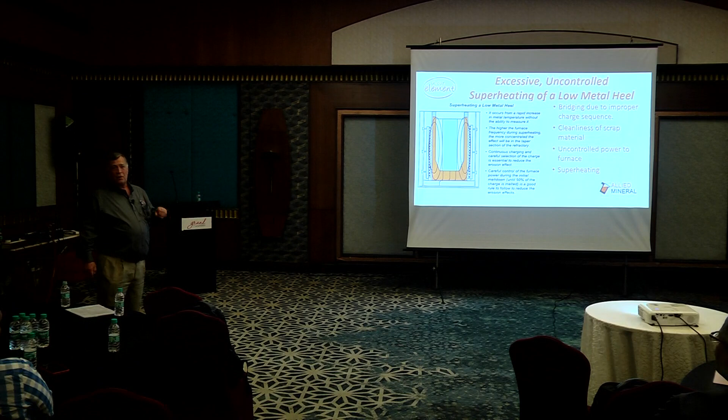So altering the thermal gradient, changing the thermal conditions of the taper section. Again, we already talked about this also. Change in thermal conductivity of the backup, meaning using mica or paper. Change in the slip plane, a change in the taper design, an interruption in the cooling water.

So if you have power outages and you don't have a generator backup and you lose coolant, it only takes a few seconds. You can lose your water circulation and you're done. That lining is going to start to sinter very quickly, and you have very, very little time to bring it back up and stop and build up on the surface of the refractory.

So sometimes getting metal behind the buildup is what they're talking about. Sometimes in the taper section, if you get too much buildup, it infiltrates between the lining and the buildup, and that becomes a superheating condition as well.

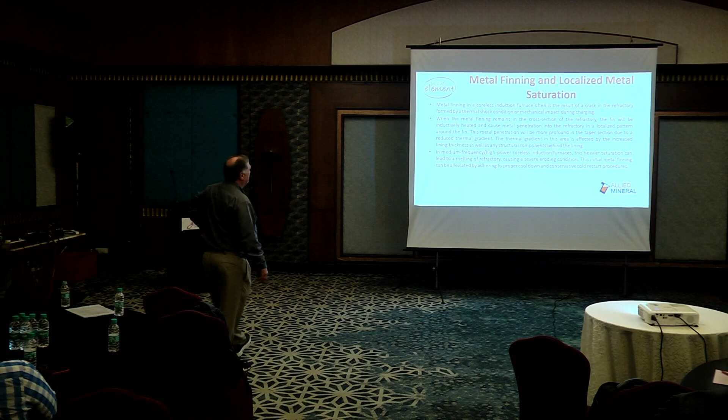Metal finning, metal finning in coreless, of course, we know it comes from thermal shock, but it also comes from saturation. If you have a saturated lining, it's much less resistant to thermal shock than if you have one that's sintered properly. If you have a shallow hot face and you thermal cycle it, cracking will be less. If you have saturation from improper sintering, finning can happen because it's going to crack worse. And those cracks from saturation, in some cases, won't seal on their own, so that makes it even more difficult.

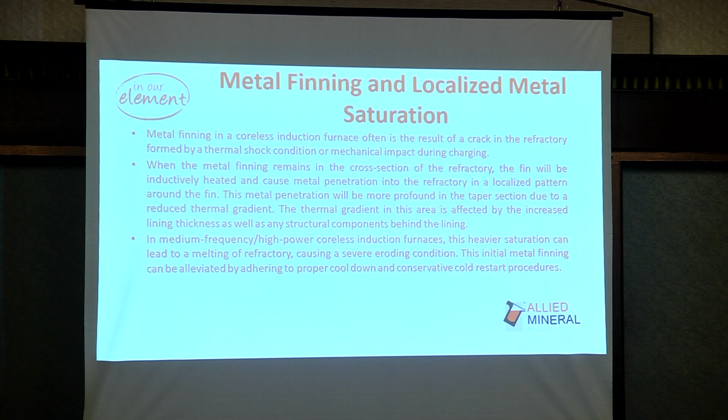Finning is an issue, and it happens in the bottom typically because that's where you get molten metal first. So if you don't use a proper daily heat-up cycle, what we call a cold start procedure, then a lot of that's going to take place in that taper section and floor. And that's going to cause, once you get a fin, now you're putting tremendous amounts of energy into a very small section of metal, and it superheats all the way up into 3,500, 4,000 degrees quickly. It causes an issue.

Again, the presence of non-ferrous metals. So in conclusion, strict adherence to installation, use quality charge material and preferred sequence and sizing.

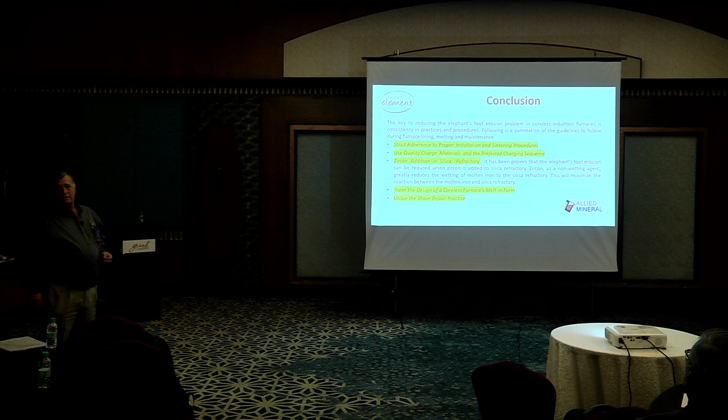Zircon addition to the silica refractory. It's been proven that elephant's foot erosion can be reduced when zircon is added to silica. Zircon is a non-wetting agent, greatly reduces wetting of the metal to the silica refractory. I would say that it's a 50-50 situation. Sometimes there's a benefit to zircon, people see it right away. Sometimes they don't see anything. The problem with zircon is it increases your cost. Zircon is becoming very scarce, very hard to get, and the harder it is to get, the higher the price.

So, taper, the design of the coreless melt-in form, utilize shave repair practice. All of these things can help you extend the lining life, changing and playing with your taper and doing a proper shave repair.